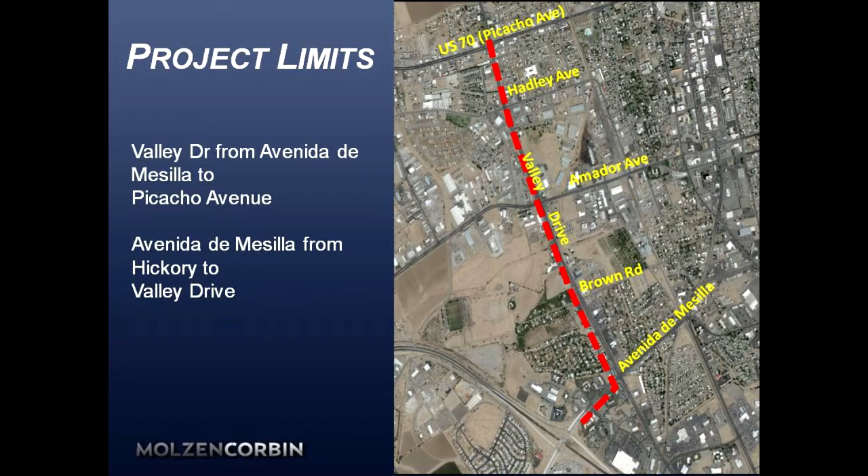And then this project includes lots of safety improvements, access control, driveways, ADA improvements from sidewalks, bicycle lanes, bus stops. We have lots of signal improvements, drainage improvements, and of course we're redoing all of the pavement. One of the things that we're incorporating now is some landscaping, and then the city of Las Cruces is also upgrading the utilities as part of the project.

One of the aspects of this project that's important to note is that the NMDOT is the current owner of the roadway, but upon completion of the project, the road will be transferred to the city of Las Cruces. And so the city of Las Cruces will take ownership of all the right-of-way, and they will take all of the maintenance over for the entire life of the street. And so with that, we've incorporated a lot of the city design standards. The city has been involved from day one on the decision-making process and throughout the entire project.

One of the things we've talked about in the past is the traffic study. So we don't want to design the street for the traffic today. We want to make sure that it'll work in the future. And so we projected traffic into 2040. And we also looked at 17 intersections. We did a driveway analysis based on the State Access Management Manual, and then also input from you all. We also did a safety analysis, which included crash history, the locations of the crashes, and then signal warrants at 7 intersections were also done.

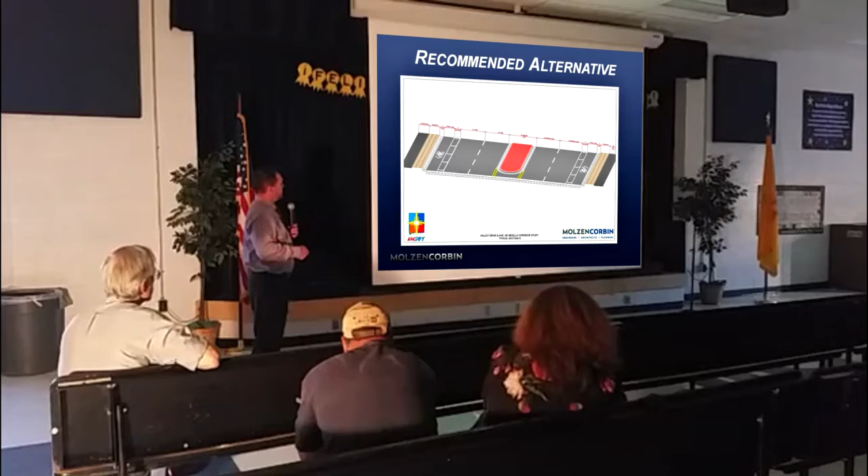Thank you. So as we first started this project, a lot of you, we saw you when we were just developing the alternatives. You remember we had lots of things on the wall, stickers for everybody to put on their favorite alternative. And through that process, we screened down those alternatives to this recommended typical section. I'm going to start in the middle and work my way out. We have a raised median. Sometimes it's raised, sometimes it's not, depending on the location, but for the majority of the project it is raised.

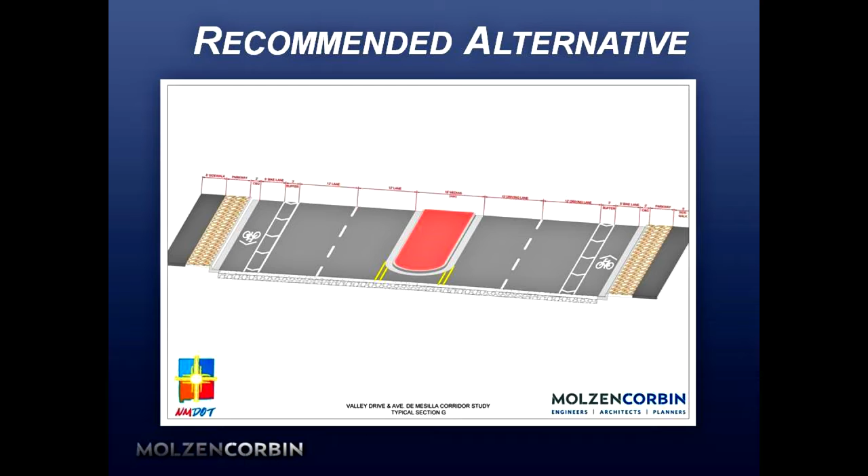And then we have two 12-foot driving lanes and a buffered bike lane, so there's a 3-foot buffer and then a 5-foot bike lane. We have curb and gutter, parkway, and then sidewalk behind the parkway. As we proceed north and get closer to Picacho, the right-of-way narrows, so we end up reducing or eliminating the parkway. And if we run out of right-of-way again, we reduce or eliminate the buffer. As we go through the Picacho intersection and proceed north on Valley Drive, the bike lane is a shared lane, so we introduce that shared bike lane at the Picacho intersection.

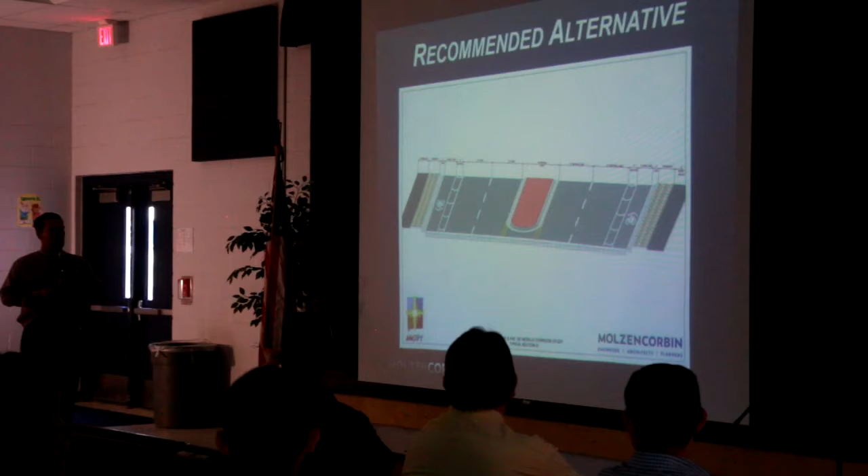At the last stakeholder meeting that we had, probably early this year, February, I believe, one of the things that came up was Amador Proximo and a lot of the changes that resulted from that. While we were doing the Phase A-B study, the city of Las Cruces also conducted what they called the Amador Proximo Community Blueprint. They were looking at an area within the project limits of Valley. Valley Drive is the western limit, and it goes from Amador to Hadley, kind of a square in there. And they had a pretty quick process of how to redevelop that area.

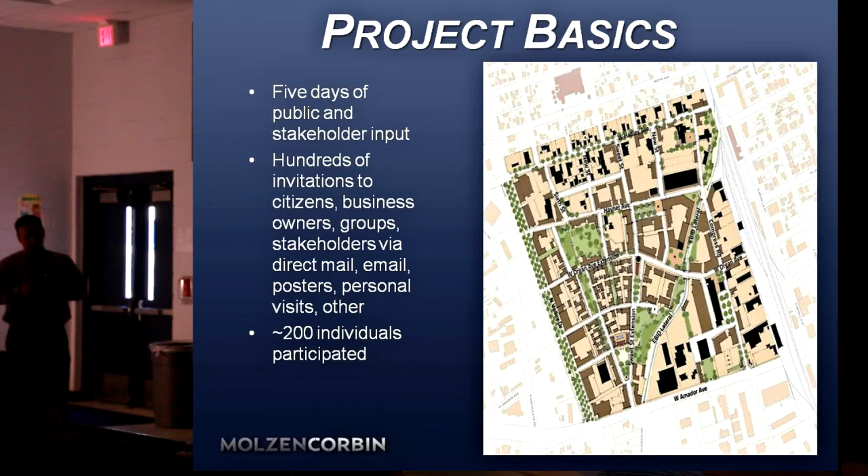Since then, we've done lots of property owner interviews. I think we've been to every business more than once. We've met with all of the property owners and business owners, and we've gotten your feedback, and we really appreciate that. A lot of the feedback, especially from the property owners within this Amador Proximo area, was negative. So we expressed that to the city and the NMDOT, and we kind of took a step back.

And so if you guys remember, we were thinking that this project would probably almost be in construction right now, but because of that input and that feedback, we've taken a step back, and we wanted to make sure that we got this right. And so we went to the city council and we had a work session and a resolution in February, and the city council approved a phased approach to Amador Proximo.

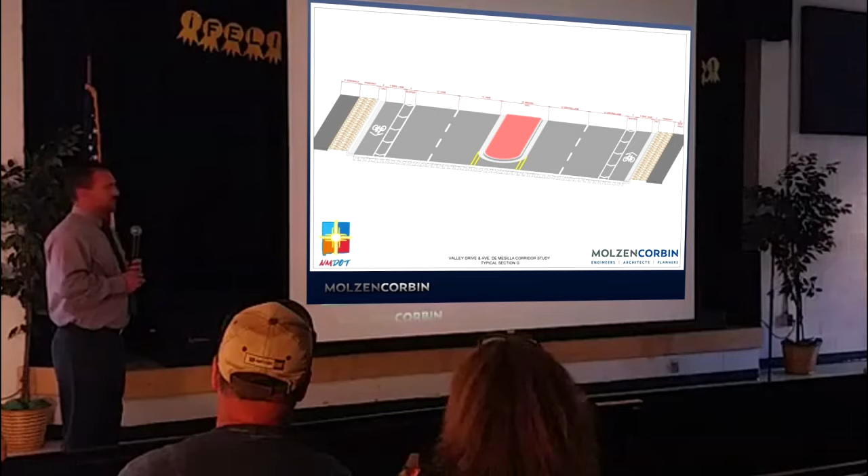We didn't eliminate Amador Proximo at all, but they recognized the importance of the existing businesses along the corridor and maintaining access to those businesses. And so the city council approved continuing the continuous typical section G throughout the corridor. And so the same typical section I showed you earlier will be utilized throughout rather than have those frontage roads. And that is directly from you guys. So thank you for your input on that.

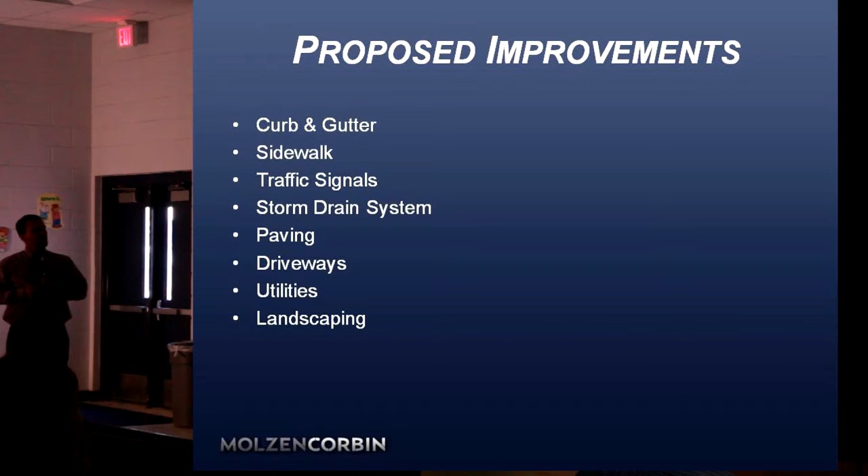A few other things that have come out of that. One of the most important things is the landscaping. If you guys can see on the placards against the wall, and then as you looked at the maps at the back, you could see little clusters of landscaping. And so with the trade-off of the Amador Proximo, we added landscaping to make up that cost savings. And I'm just going to quickly show you some of that, what that might look like.

This thing doesn't know if it wants to work or not.

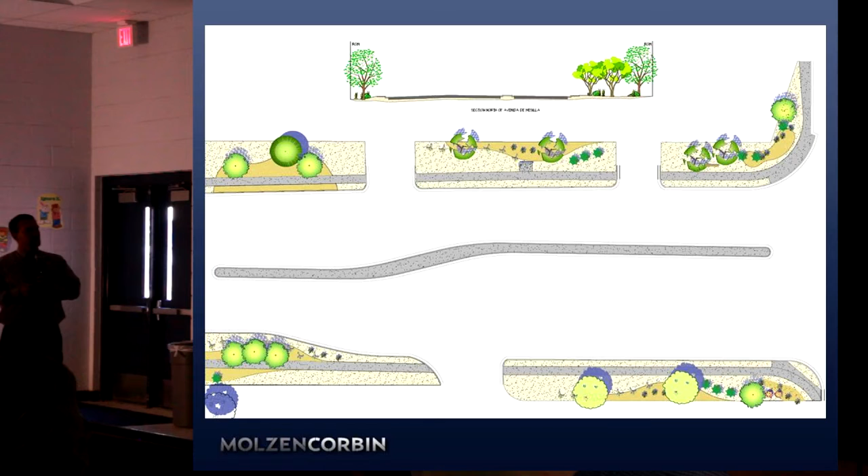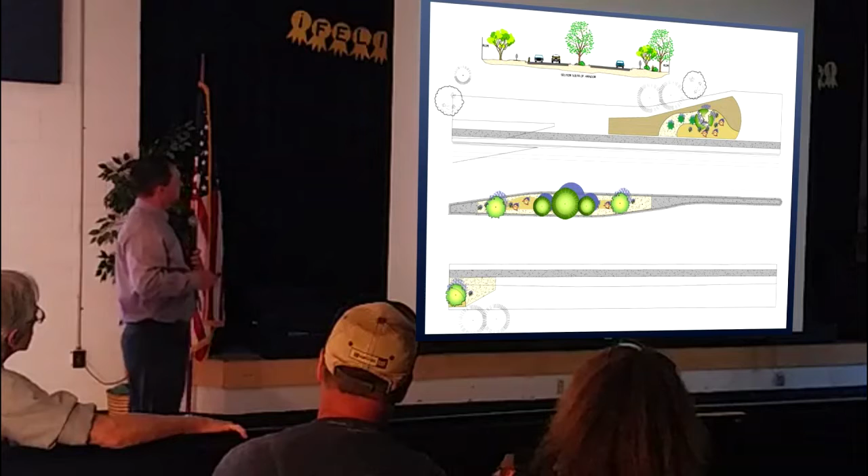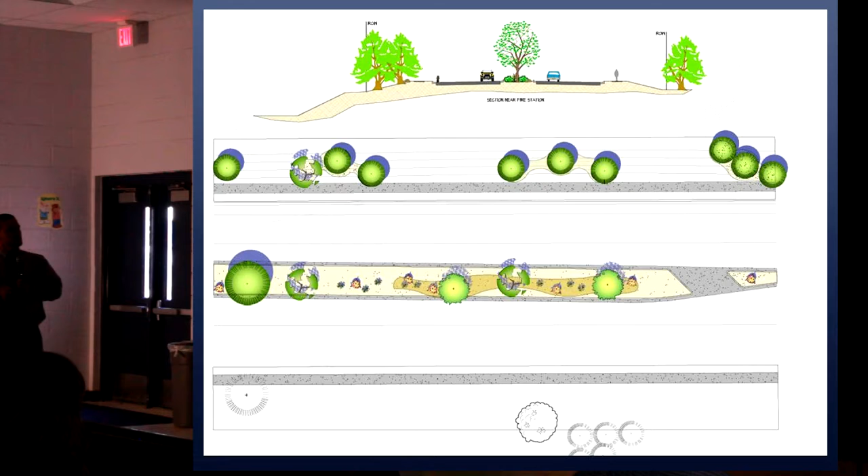And then as we proceed north, here's the section at Amador, close to Amador. You can see little pockets of landscaping. And then as we go further north, here's the fire station. And so that was one of the things that we wanted to make sure that you guys were aware of tonight as well. And then this is approaching the Picacho intersection here.

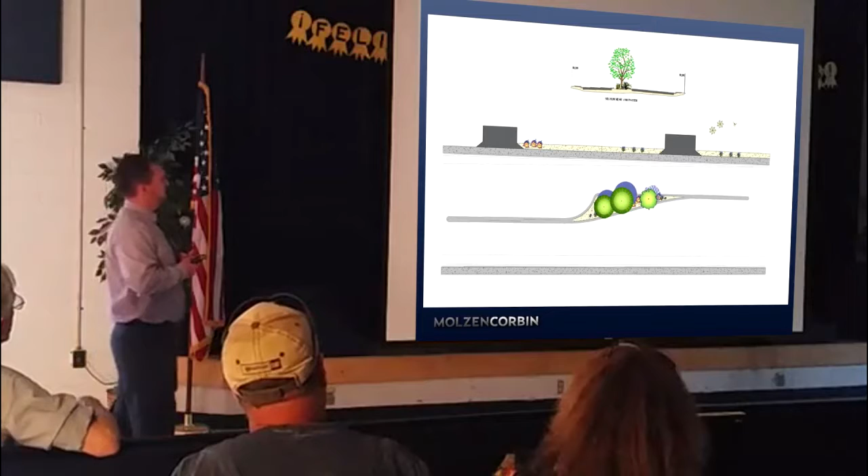One of the big things that I know always comes up when I talk about this project is how in the world is it going to get built? And so in the plans, which are back here, we've broken it into 3 phases. The first phase that we show in the plans is from Picacho to Amador. And within that, the contractor is supposed to complete the entire street within that stretch. And then the second phase is from Amador to Avenida de Mesilla. And again, they're supposed to complete that entire stretch before they move on. And then the final phase is Avenida de Mesilla.

We have the traffic control phased such that they will build half of the road at a time. And then we are going to leave 3 lanes open at all times. We're going to have a driving lane in each direction and then a middle turning lane. There may be a few times at an intersection, or if we're having to do something, that they may need to eliminate the middle turn lane, but not for any long duration.

And then access to businesses, that's something that's not up here, but the contractor will be required to coordinate with all of you guys to provide you reasonable access during construction. You may have to kind of weave through some barrels or something, but there will be signs that say business access, or always a way for you guys to access your business during construction.

And then finally, the schedule. That's something that we always wonder about. We are currently at 90% design. We have a PS&E, which is the 100% review meeting, in a couple of weeks. And then we will turn in our final plans at the end of June. And then we anticipate the project to bid in probably September or October, and then construction to begin in the late fall to early winter. Depending on the contractor, we may end up pushing that to the first of next year, but somewhere in that time frame is what we're expecting.

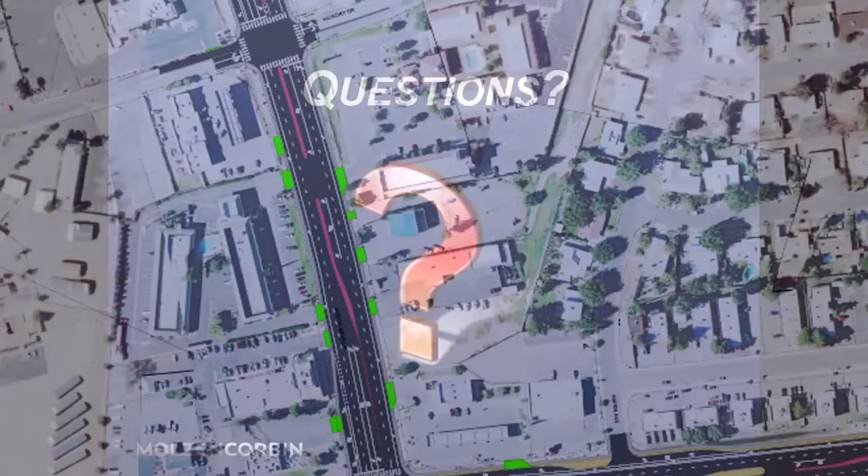And then with that, if you guys have any additional questions, I'd be glad to answer them. Yes, sir. Will it be paved access to our business all the time, or can we expect dirt roads, gravel roads? I would say that you probably at times would have a gravel or a base course road.

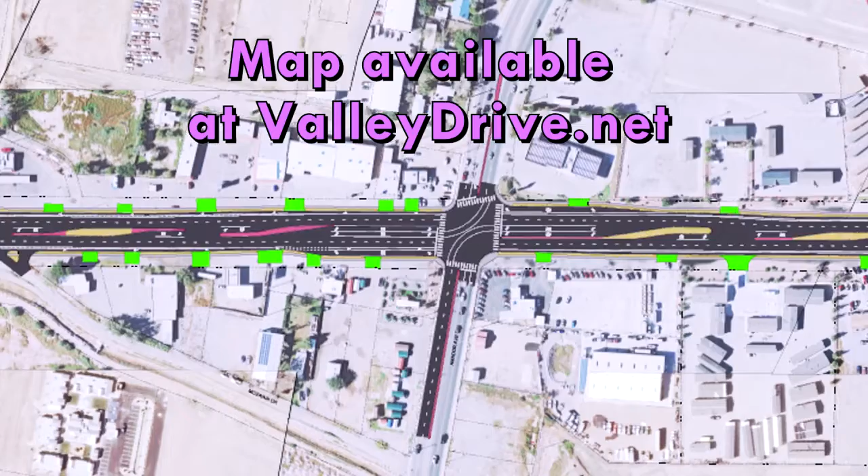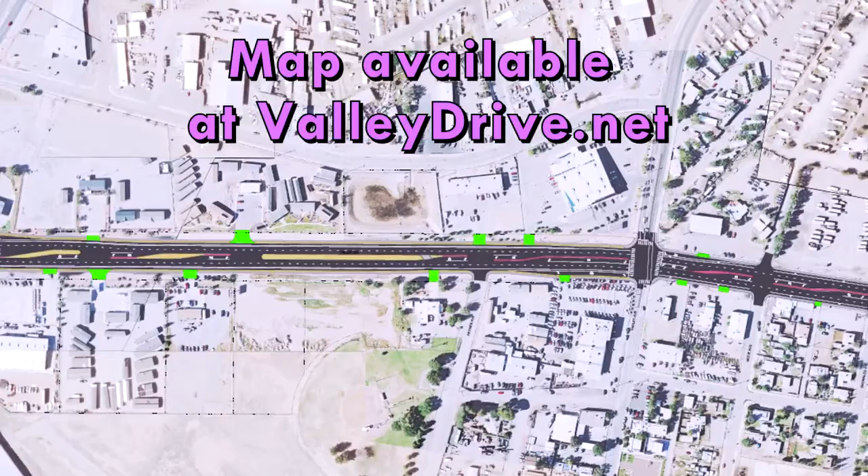Yes, sir. In one of the original things, y'all were narrowing the street on Valley as it approached Amador. Now that you've done away with those frontage lanes, have you done away with narrowing that street down? Yes, ma'am. The driving lanes throughout the entire project are 12 foot wide. In the Amador Proximo section, those narrowed to 11 feet. And then we continue to have the buffered bike lanes, so we have an additional 8 feet on the roadway where we didn't have before. Okay. But y'all didn't create that bottleneck like y'all had. As you exited the frontage road, y'all had created an extra bottleneck, so that's gone, right?

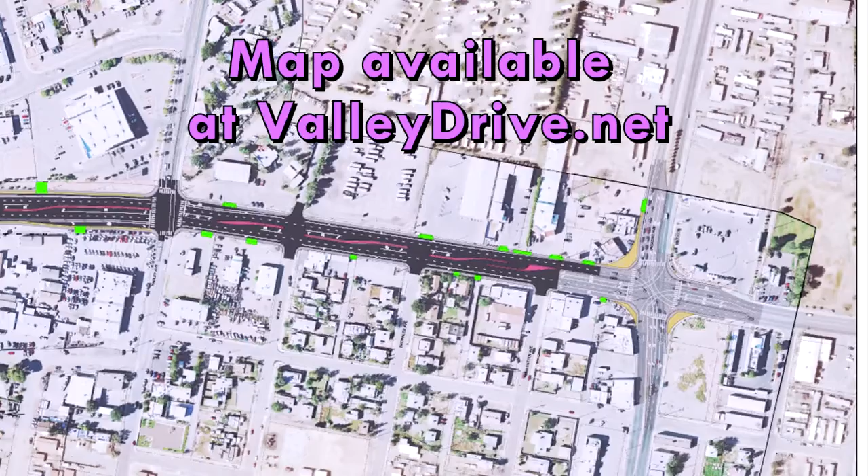Yes, ma'am. And then on Hadley, on the streets that are going east and westbound, is there going to be a turn signal? I know the light's existing, but are you putting a turn signal for east and westbound traffic? So on Hadley, that is one of the streets that is getting reconfigured. Right now, Hadley has a shared through left turn lane in both directions. And we're actually changing that to be a dedicated left turn lane in both directions and a shared through right turn lane. So that'll be more standard to what you expect.

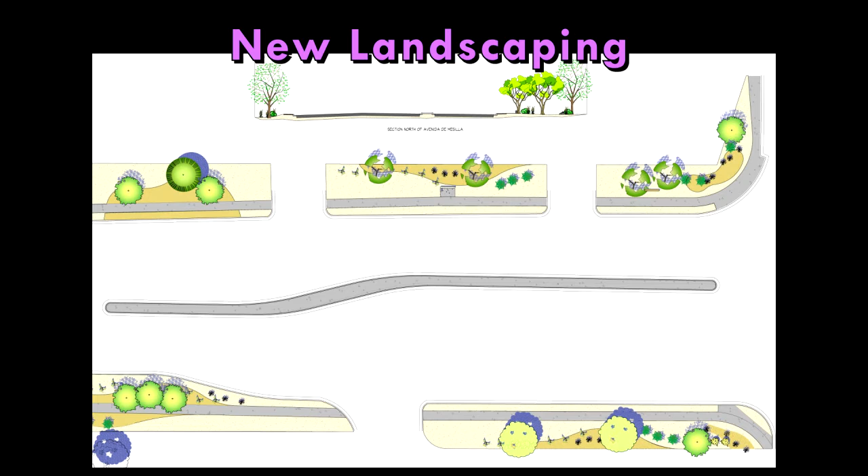So the signal cycle will have a green arrow. It will have an arrow. Yes, ma'am, for both directions. And then the through or the green ball will allow you to go straight through. That's great. That's needed. Thank you. Yes, sir. You had mentioned bus stop.

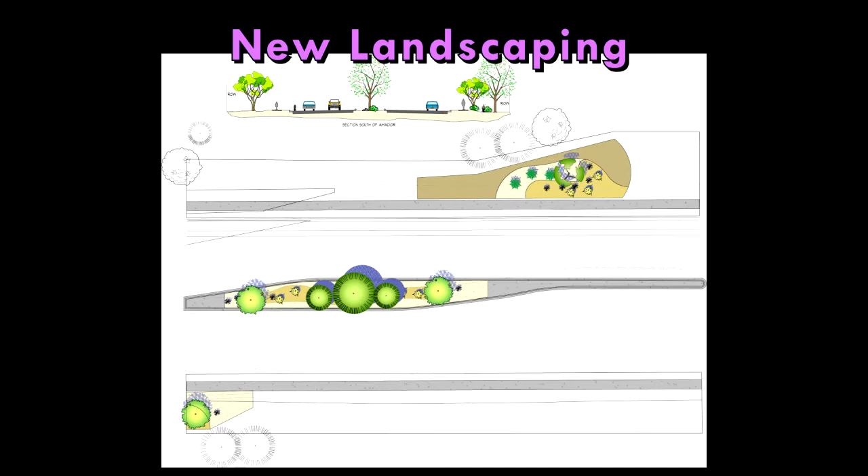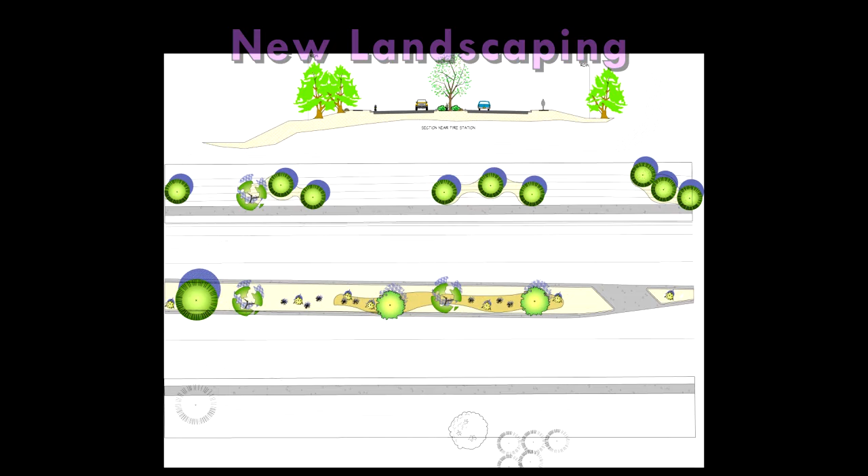Will there be benches out there or any kind of shelters for the bus stop? At this point, we are not putting any shelters. As part of the landscaping, we are putting some small little rock benches. They're really not meant to sit on. We are making the sidewalks wider in that area. I think they're 9 feet wide in those areas. And then the city, I believe, has a long-term plan. They've been putting in those turquoise bus shelters here and there. And so that'll be something that can come in later. Yes, ma'am.

It's going to depend on the contractor. For the whole job, we have estimated that it's going to take between, I think, 14 to 18 months. So if you look at 6 months per phase, some of them may go faster than others, but roughly 6 months per phase. Yes, sir. Is there any control as far as the contractor is concerned? I mean, we have a real problem on Main Street, and I think it was absolutely ridiculous. How are we going to control this not happening on Valley Drive? Because you're going to kill a lot of businesses if it's not controlled.

So I believe, and correct me if I'm wrong, Aaron and AJ, that the NMDOT has implemented a scoring system for contractors, in which it's not just low bid. In the past, it's always been the low bid contractor gets the work in New Mexico for state projects. However, now they've implemented a point system where contractors are pre-qualified and they're scored based off of their past performance. And so I know that there's been a few projects around the state where the low bid actually hasn't been awarded the contract because of those pre-qualifications.

Is there going to be a time limit set within the contract also? Or has he got forever to complete the contract? There is a time limit, and they will be assessed liquidated damages if they go over that time limit. I'm not sure what that dollar value will be at this point. I'm not sure who determines that. $1,000 per lane mile per day. Is that time limit 14 months, or is that time limit 5 years, or what is the time limit? You said the project is between 14 months and 18 months, I believe. Right, and what is the contract going to be? Do they say you're going to get it done in 14 months, or you get a penalty?